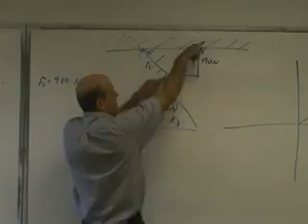The wire can only pull directly in the direction it's at. It's like a rope. Whatever direction it's in, that's which way it's being pulled. It doesn't have any strength side to side. So the wire's being pulled just like this, but you break it into X and Y components. This is the X component, and this is the Y component. We know that this Y component is lifting half of this, so that's 490, right?

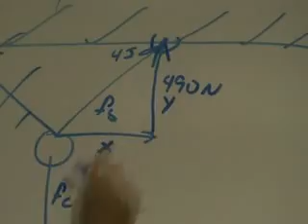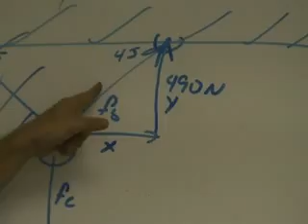Okay, so now we just got to do some trigonometry, geometry stuff, and we can calculate, well, what's this side of the triangle, right? More or less than 490? You say more or less? More or less than 490. It's going to be more. It's going to be more.

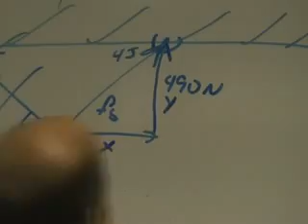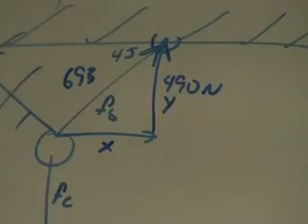Isn't there a similar ratio for triangles that have two 45-degree angles? Yeah, it's 1, 1, square root of 2. Yep. So it's square root of 2 times 490. 692.96. 693. 45. Wait.

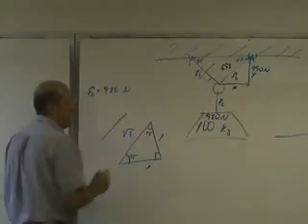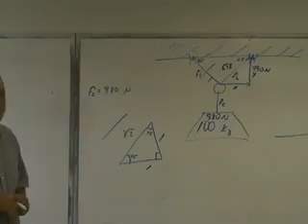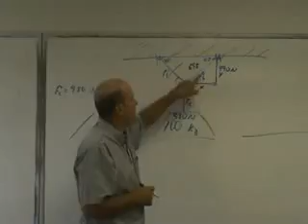A right triangle that's got a 45 and a 45 is 1, 1, square root of 2. That's the ratio of the three sides. It's a special case, kind of like the 30, 60, 90. The 45, 45 is another special case. So this side here, the hypotenuse, is the square root of 2 times as much as the 490. So he did a shortcut. He did 490 times the square root of 2.

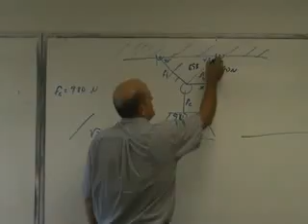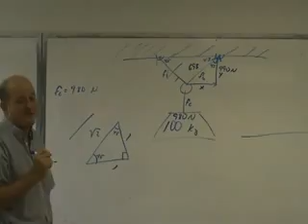You don't have to do it that way. The other way you can do this thing, if this is 45 degrees here, this is also 45, right? So then we go back and use SOHCAHTOA. And that's really kind of what you need to remember, because most times it's not going to be 45 degrees. That's just kind of the special case. So the 693 that you wrote there, is that the hypotenuse? Yes.

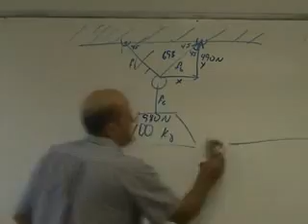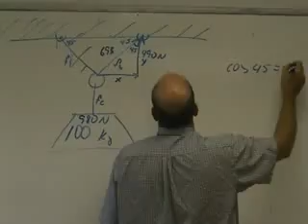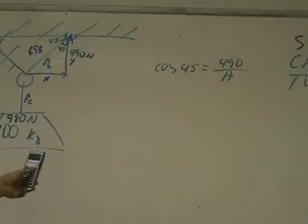Let's work it with SOHCAHTOA here. Make sure everybody is clear on this. So we've got adjacent, we want hypotenuse. So we want cosine. Cosine of 45 is equal to 490 over the hypotenuse. So we've got 490 divided by cosine 45, 693 newtons.

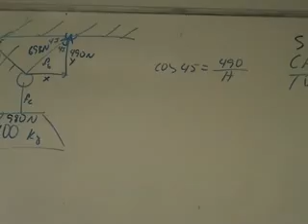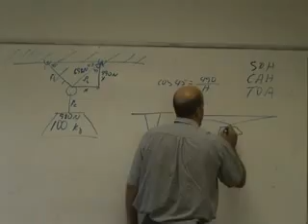Okay, now remember last time I said we were talking about what this thing would look like if it was at different angles. We do the same problem with it like this, versus if it's like this. Remember that? Now, think of what you just learned about these triangles here, and think about the force in the line.

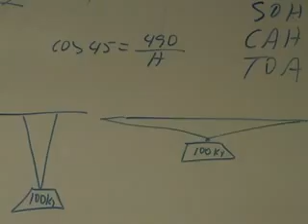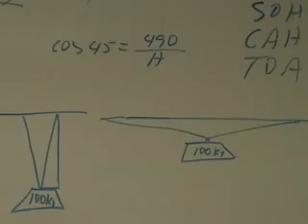In each of these cases, this y component is what? What's the y component of this line? Look at this. It's the same as here. It's 490, right? Well, it's got to lift 50 kilograms, so it's 490 newtons. So this line is almost the same length as this one. It's just a little bit more than the 490, right?

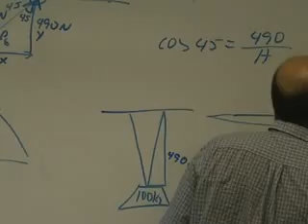How about on this one? Look at all the dashes. It's a lot more than 490. It's 2 or 3 times 490. It's like 1,500 or something.

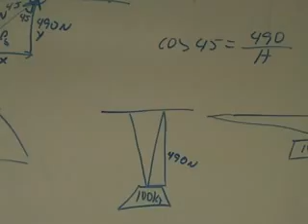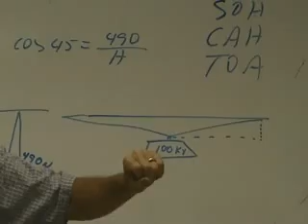So think of me sitting in this ring. I'm not a small person, and you try to pull that line until the rope is straight across. Does that bring it to fruition? You're going to pull pretty dang hard. You can't get it flat because I'm always deflecting a little bit. You have to pull infinitely hard to get that line completely straight. Okay.